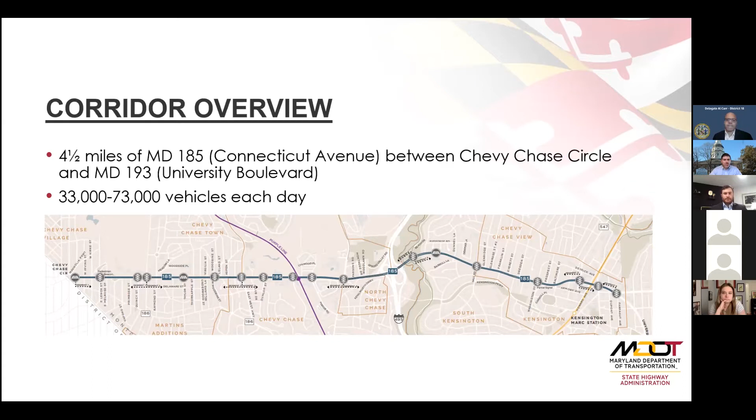Connecticut Avenue is a complex corridor, no question about it. Depending on where you're traveling, there are as many as 73,000 vehicles each day that we need to work to accommodate safely. Yet, no less importantly, we need to ensure safe access and mobility for more vulnerable users - pedestrians, cyclists, transit users, and others who use the corridor but are not driving. With the Purple Line arriving in the next few years and ongoing and future development in the corridor, we know demand and needs will only continue to increase.

With that complex mix of users in mind, how did we approach this needs analysis? First, this needs analysis proposes a flexible vision for the corridor that better supports and balances access and mobility for all users, paying special attention to those more vulnerable users - a key focus for MDOT-SHA, on which our context-driven initiative has been placing an ever-increasing emphasis.

Connecticut Avenue also is a long and varied corridor. Our goal has been to strike the right balance in the right locations based on the unique qualities of 6 subsegments, knowing that what might be appropriate in Kensington may not be appropriate in Chevy Chase or near the Beltway, or vice versa. Ultimately, our goal has been to propose a menu of preliminary concepts that can be advanced as resources permit, using little and ideally no additional right-of-way beyond what MDOT-SHA already owns.

Some could move forward independently, some in packages, some may not move forward at all. The typical sections we'll show in a bit illustrate an ultimate vision for each subsegment based on putting together all these concepts over time. I do want to reemphasize that these concepts are preliminary in nature.

That's why we're here tonight - to get your feedback, to learn more about how you feel about the corridor. This is not a NEPA-style alternatives analysis that you may have been involved in in the past. Getting to the point where a concept can become a reality requires a lot more work: additional, more fine-grained analyses, detailed environmental analysis, design, and engineering. Though some near-term low-cost elements already are moving forward, as Joe will discuss in a bit.

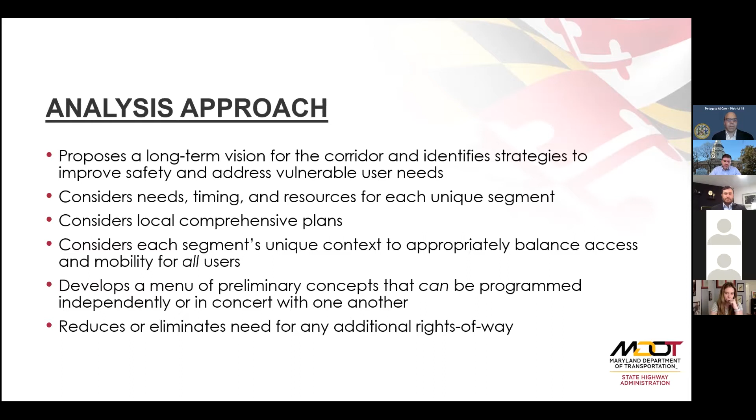I mentioned context-driven, an MDOT-SHA initiative that helped guide MDOT-SHA's approach to this needs analysis. To highlight a few key elements of context-driven: we know that there is a lot more nuance to Maryland than simply classifying and identifying appropriate improvements based on an overly simplistic urban versus rural taxonomy. MDOT-SHA's 2020 Context-Driven Access and Mobility for All Users guide outlines, rather than 2 contexts, 6 much more nuanced contexts and what types of engineering safety countermeasures are appropriate in each.

The 6 contexts are urban core, urban center, suburban activity center, traditional town center, suburban, and rural. Key to this nuanced approach is that planners and designers should understand the appropriate balance between access and mobility, which varies depending on context. In more rural areas, mobility is emphasized - how far can you go? In more urban areas, access is prioritized - how many places can you get to?

In those in-between conditions, such as along Maryland 185, striking the right balance is crucial. The most important part of this framework is that MDOT-SHA can address the needs of all user groups in and alongside the roadway. It allows MDOT-SHA to prioritize vulnerable users where safe access is paramount, and encourage predictable driver behavior where mobility is critical.

With context-driven in mind, we used a number of metrics to better understand existing conditions along Connecticut Avenue. These included pedestrian level of comfort, a tool developed by our colleagues at Montgomery Planning. This incorporates factors such as sidewalk or path width, buffer from traffic, roadway lanes to cross, presence of marked crosswalks, and more. Our analysis indicated, as you can see in the top graphic, pedestrians were least comfortable in segments 4, 5, and 6 along Connecticut Avenue. That's to the right. In large part due to sidewalks being immediately behind the curb without a buffer in many locations.

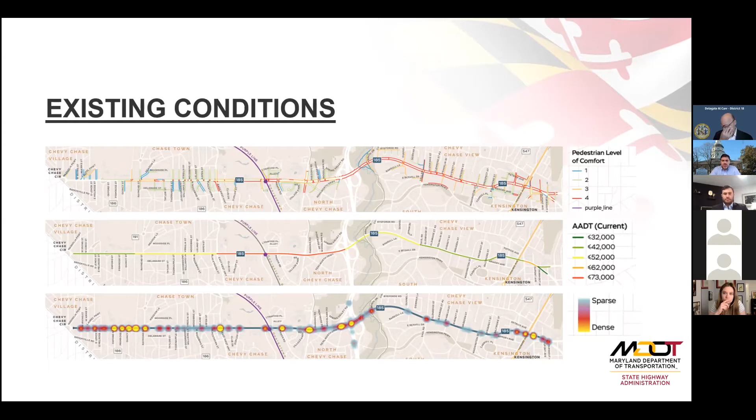So segment 4, that's Jones Bridge to Beach Drive, including the Beltway interchange. Segment 5, that's Beach Drive up the hill to Knowles Avenue, primarily residential in nature. And segment 6 from Knowles to University Boulevard through central Kensington. I'll be giving you a quick overview of each segment, but certainly encourage you to get the full picture by reading the analysis report online, and there'll be a link to that at the end of the presentation. So let's get into the segments.

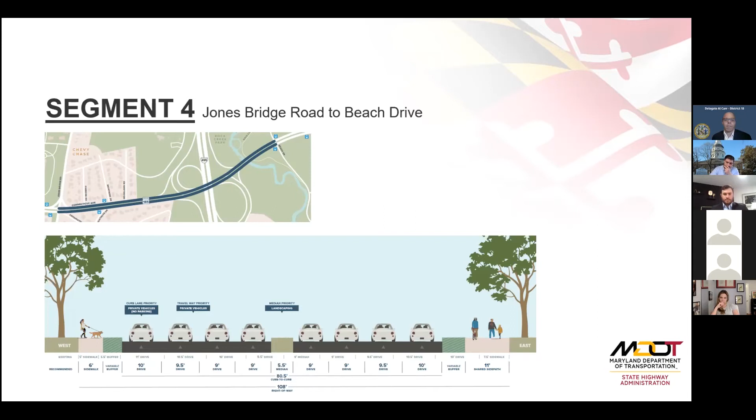So today, segment 4 accommodates 6 lanes of traffic, 3 in each direction. It handles nearly 70,000 vehicles each day. Cycling opportunities, which could take advantage of the connecting Rock Creek Trail, are limited with the lack of dedicated facilities along Connecticut Avenue. The needs analysis identifies a vision that continues to accommodate the high volume of motorists in this segment at and near the Beltway, retaining 6 to 8 lanes of traffic. But by strategically narrowing those lanes, it also proposes to improve facilities for bicyclists and pedestrians by retaining the west side sidewalk, but with an improved buffer, and by introducing a new shared use side path for bicyclists and pedestrians behind a buffer that today does not exist along the east side.

Segment 5, while still heavily traveled, does present more opportunities, as rather than 70,000 vehicles each day, it sees more in the neighborhood of 40,000 vehicles, currently accommodated by 6 through lanes. Like segment 4, cycling opportunities, which again can take advantage of many connecting facilities, are limited with the lack of dedicated facilities along Connecticut Avenue. The needs analysis extends northward similar facilities as in segment 4. These include buffered sidewalks along the west side, and a buffered side path along the east side while retaining those 6 lanes, the landscaped median, and left turn lanes.

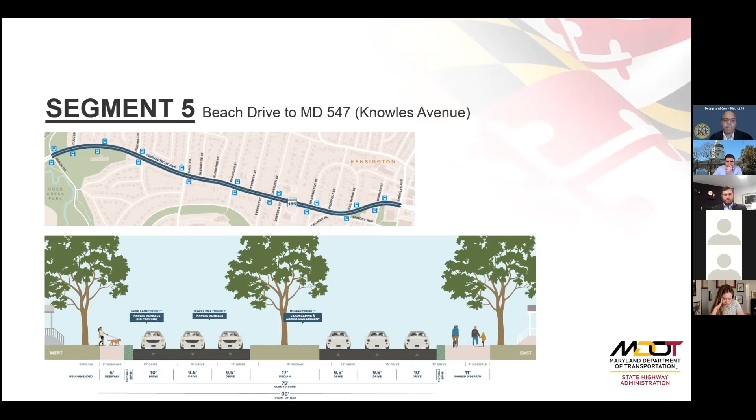This concept is made possible by narrowing lanes, especially the extremely wide 13-foot outside lanes, whose width can be repurposed for side path and buffer spaces. The analysis also recommends improved pedestrian signaling at Saul and at Knowles, as well as tightening curb radii to slow turning vehicles and increase motorists' awareness of cyclists and pedestrians.

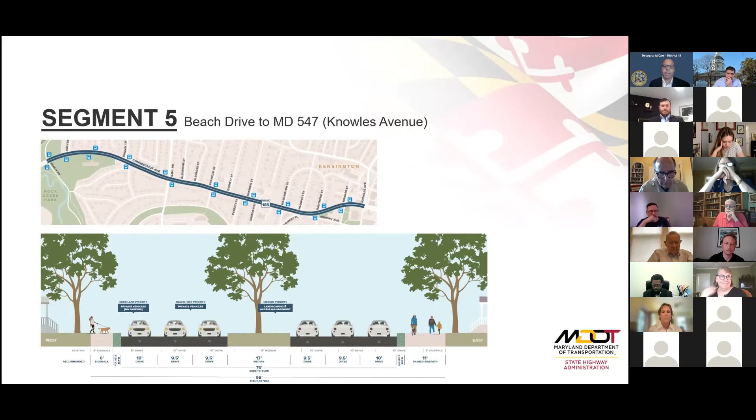To accommodate this complex mix, the needs analysis proposes retaining 6 through lanes, as well as lowering speed limits. While additional analysis would be necessary, rules of practice show that a 6-lane roadway can accommodate upwards of 55,000 vehicles per day. The analysis also suggests that the use of automated red light enforcement could improve safety and operations. For bicyclists and pedestrians, Segment 6 continues the facilities from Segments 4 and 5, with buffered sidewalks on the west and a buffered side path on the east, made possible by that narrower roadway.

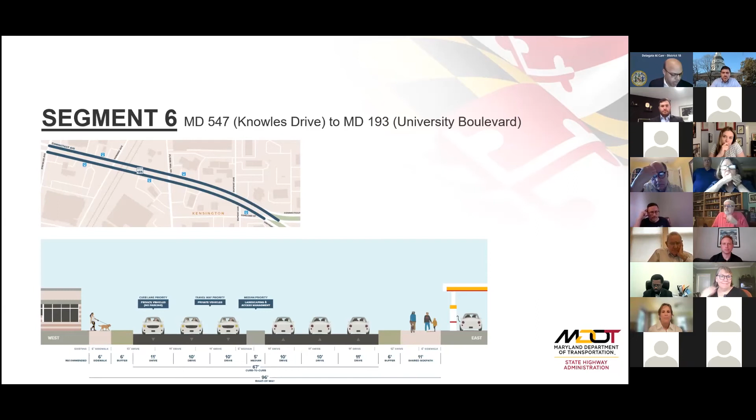Overall, MDOT SHA is recommending a wide range of potential upgrades. All of these will require thoughtful and intentional investments over the long term. There simply are more needs than resources. But this analysis serves as a starting point, providing MDOT SHA and local jurisdictions a coordinated menu from which to work to improve the corridor. Piecing investments together over the long term, we can achieve full build-out of this grander vision, providing safe access and mobility for all users throughout this key corridor.

In the long term, a non-exhaustive list of MDOT SHA's menu includes concepts such as modifying roadway cross-sections, including implementing road diets where appropriate to accommodate dedicated bicycle facilities or permit more width for pedestrians and bicyclists outside the curb. Making geometric changes, including bump outs at intersections and reducing curb radii to improve pedestrian safety and shrink those crossing distances. And rethinking or adding signals at strategic locations.

A step sooner in the medium term, concepts include upgrading crosswalks to striping more visible to motorists, improving signage to increase motorist awareness, and modifying signals to improve operations and increase pedestrian safety. MDOT SHA also recommends prioritizing those improvements closest to schools and bus stops, as well as locations with higher crash histories.

And in the near term, MDOT SHA recommends concepts including using paint to extend curbs, lessening crossing distances at those key intersections, again, upgrading crosswalks to striping more visible to motorists, and improving motorist awareness through upgraded signage, including signage emphasizing the legal requirement to yield to pedestrians.

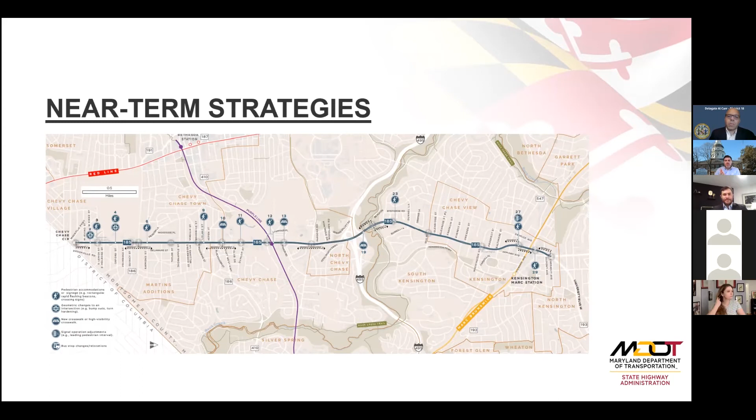Again, I encourage you, if you have not already, take a deeper dive into the needs analysis report, which is available on our website. We'll show you a link here at the end, as I've only given a very high-level summary. But before that, I want to ask Joe Mogus, our Assistant District Engineer for Traffic at our District 3 office, to walk us through a number of near-term strategies already underway in segments 4 through 6. Joe, take it away. Thanks, Matt.

Good evening, everyone. Once again, my name is Joseph Mogus. I am MDOT SHA District 3's new Assistant District Engineer for Traffic for Montgomery County. Tonight, I'd like to share some updates regarding MDOT SHA District 3 improvements implemented in the past year or so, as well as forthcoming improvements in the next 12 months or so. As you will see, there are several improvements suggested by the corridor needs analysis that were implemented during this study.

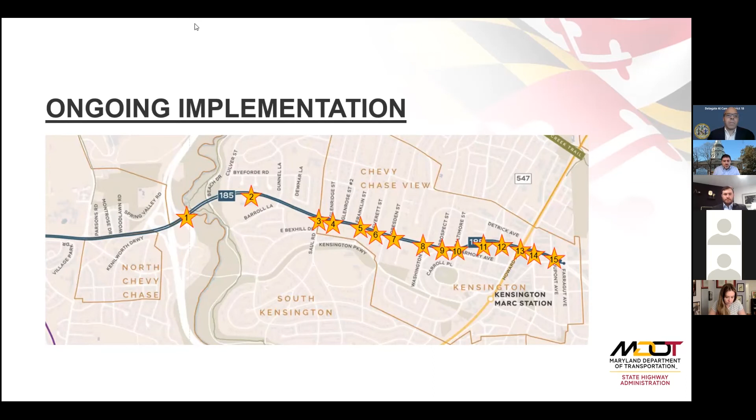MDOT SHA District 3 is continuously developing and implementing projects for various improvements for all roadway users, including pedestrians, bicyclists, and motorists. These improvements vary from simple tree trimming to improve sight distance, to signing and marking, and to signal improvements. As you can see, I've labeled some of these improvements in numerical order, from the southernmost point to the left of your screen to the northernmost point to the right of your screen. And we'll start with the first starred item labeled number 1 and proceed from there.

As you can see on this slide, our first location is Maryland 185 Connecticut Avenue at the I-495 outer loop ramp. As a result of the ongoing salt barn construction, we have recently completed reconstruction of this intersection. Reconstruction improvements allowed for westbound ramp through movement back onto I-495 outer loop. Additional improvements include LED lighting upgrades, as well as ADA upgrades for the crosswalk.

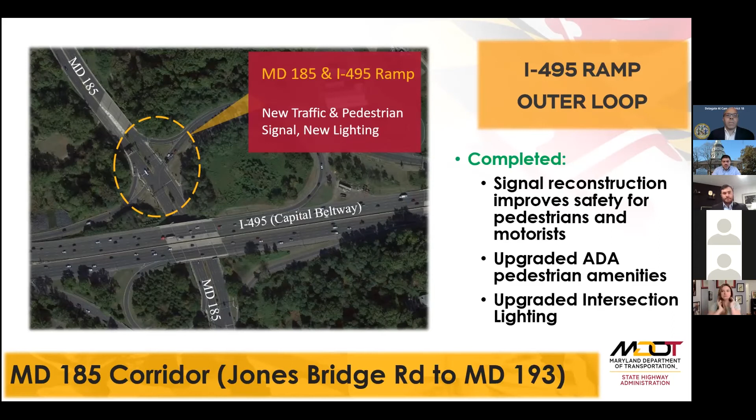Next slide, please. As you can see on this slide, our next location is Maryland 185 Connecticut Avenue at the Grace Episcopal Day School entrance. Recent improvements include improvements to the school egress. More specifically, we installed pavement markings and arrows to channelize exiting motorists onto northbound Maryland 185. This improves safety and predictability for pedestrians crossing Maryland 185 on the south leg of the intersection.

Additionally, we upgraded the existing crosswalks to our new high visibility or continental crosswalk marking standard. And lastly, we relocated the advance and intersection warning signing to more appropriate locations along the northbound and southbound Maryland 185 approaches. Next slide, please.

And as you can see on this slide, our next location is Maryland 185 Connecticut Avenue at Saul Road. As you all most likely know, we have completed design for this signal reconstruction. The signal heads will be upgraded to LED systems to enhance traffic signal visibility. We will also be constructing full ADA compliant pedestrian amenities, including APS, or accessible pedestrian signals, and countdown, and continental crosswalk marking to improve safety for pedestrians.

The new signal will include the addition of dedicated left turn arrows onto Saul Road from Maryland 185, and the installation of video detection traffic cameras that will optimize intersection efficiency. And the construction will actually be starting soon in May or June, so stay tuned for those upgrades.

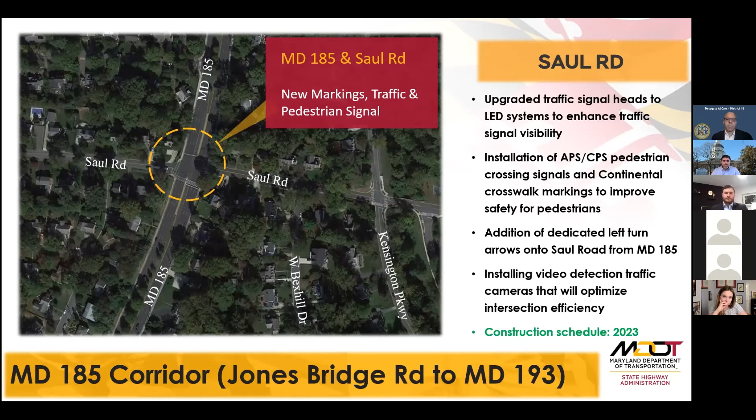Next slide, thank you. As you can see on this slide, our next location is Maryland 185 Connecticut Avenue at Glen Street. And just wanted to note that we have upgraded the existing crosswalks to our new continental crosswalk marking standards. And here we have Maryland 185 Connecticut Avenue at Glen Street. And once again, we have already upgraded the existing crosswalk to continental crosswalk marking standards.

Next slide. And here we have Maryland 185 Connecticut Avenue at Franklin Street. Here we have completed work, including advanced intersection warning signage to improve safety and operation. We have completed installation of new extension lines to improve safety for pedestrians and motorists. This is through the intersection. And we also have upgraded the existing crosswalks to the new continental crosswalk marking standard.

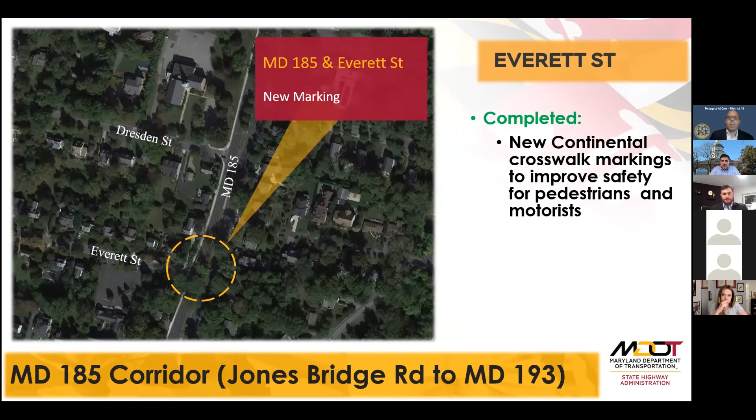Next slide. Once again, Maryland 185 Connecticut Avenue at Everett Street. And we have already completed the upgrade of the crosswalks here to continental crosswalk marking standards. Same thing here, Maryland 185 at Dresden Street. We have upgraded these crosswalk markings to continental crosswalk marking standards. And here we have Maryland 185 Connecticut Avenue at Washington Street. We do have an outstanding work order here for the upgrade of the crosswalk markings here to continental, and the implementation schedule is, as shown, fall 2022.

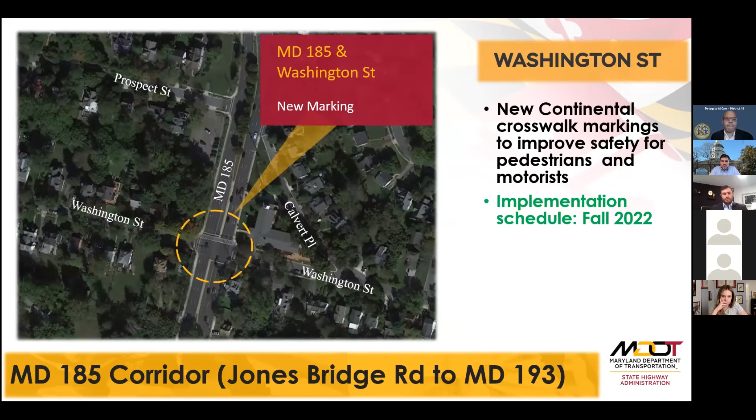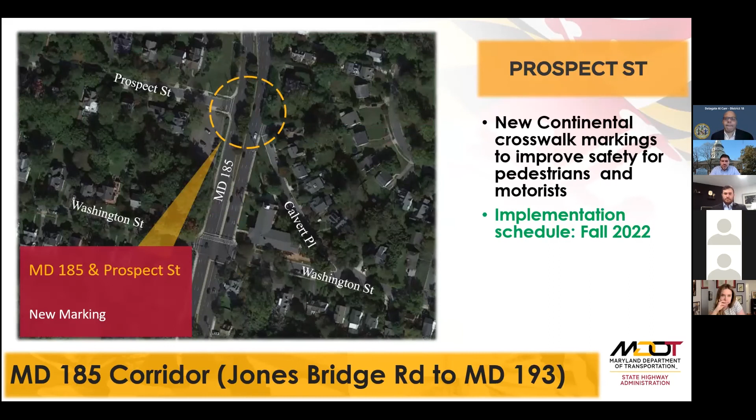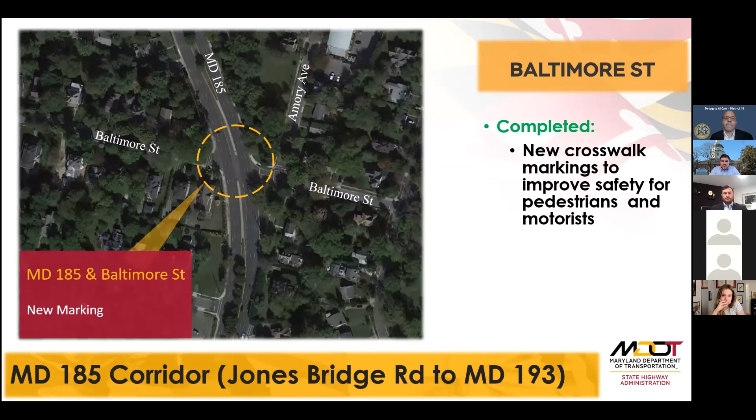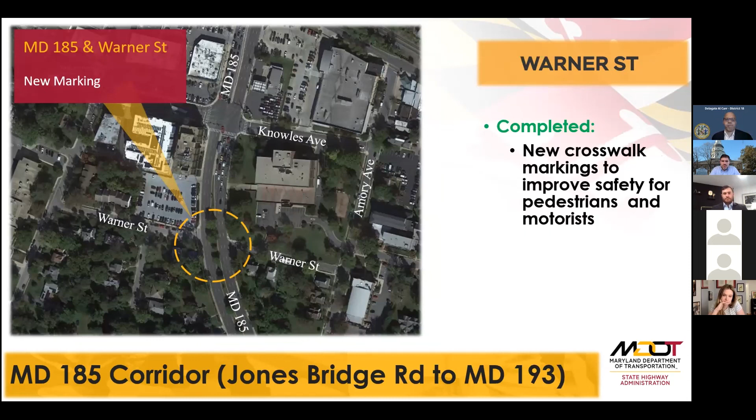Similarly, Maryland 185 Connecticut Avenue at Prospect Street. We will be implementing the new continental crosswalk marking standards at this intersection by fall 2022. Baltimore Street, Maryland 185 Connecticut Avenue at Baltimore Street. We have already upgraded the existing crosswalks here. This was done probably 4 months ago. Here we have Maryland 185 Connecticut Avenue at Warner Street. We have also completed crosswalk upgrades here in the past few months.

Maryland 185 Connecticut Avenue at Maryland 547 Knowles Avenue. We have completed the upgrade of the continental crosswalk marking standards at this intersection. We are happy to inform you all that we will be installing new R10-15 turning traffic yield to pedestrian signing at this intersection, which is slated to be implemented in fall 2022, which is also in line with this document we are discussing tonight.

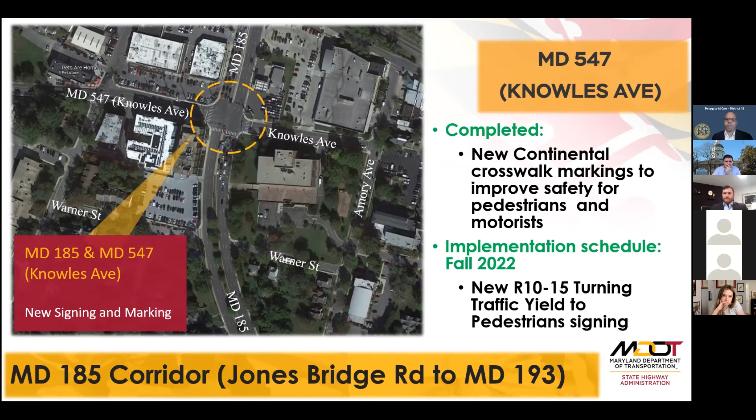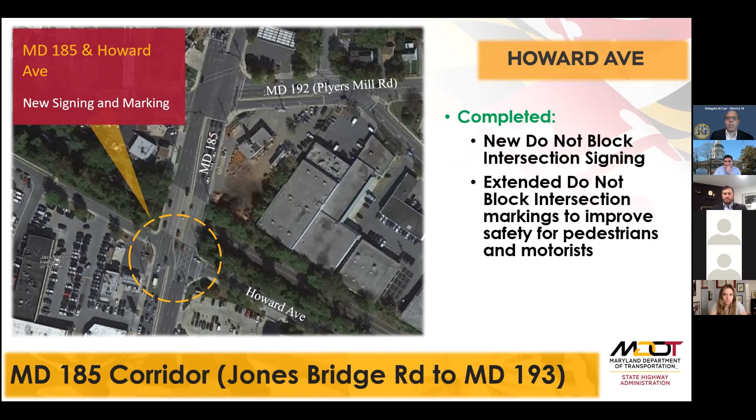Here we have Maryland 185 Connecticut Avenue at Howard Avenue. As you all know, we have recently installed new do not block intersection signing along both approaches of the subject intersection. We have also upgraded or extended the do not block intersection markings along the northbound approach. So now it also covers the leftmost through lane. This is as a result of frequent concerns about queuing, backing into Howard Avenue and blocking southbound left turns onto Howard Avenue.

And just north of that, we have installed the object markers for this intersection on the east leg of the subject intersection, which is Maryland 192 Plyers Mill Road.

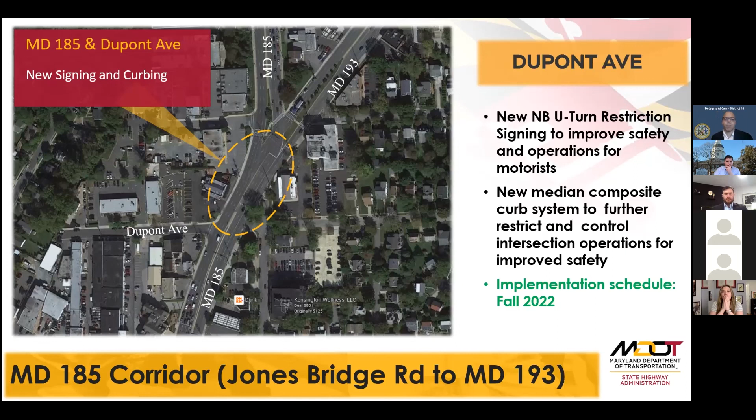Next slide. And I will just note that we have ongoing studies and initiatives, so please do not consider this a complete and final list of improvements. Let this presentation just reflect the volume of work already completed and soon to be completed as of April 2022. And with that, I am happy to pass this presentation back over to Matt.